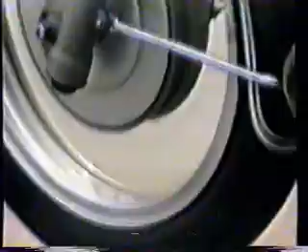Motorcycles when I move along. I got a friend who fixes them, though I said I'd write this song. I use 3 chords and I'll try to make it rhyme, but don't get your hopes up, they didn't give me too much time. I remember American bikes, but now there's just one left. Gotta be big and mean to buy one and go way into debt. And there were British bikes that you took on down the road.

Hi, motorcycle lovers. What we'll be doing this time is the wheel. We'll be taking the tire off from the rim and the rim off from the hub. The reason we're doing this for this customer is he would like to have installed stainless steel spokes and nipples.

But other times that you do this is if you've damaged your rim, or if you're doing a restoration and you want to replate a steel rim, or you wish to use your original spokes and nipples but they're rusty and you want to get them plated.

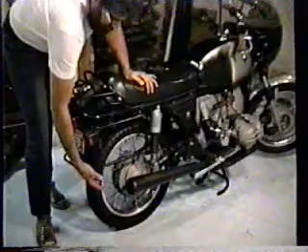The first thing we'll be doing is taking the wheel off the bike. Now most of that's covered in your manual, but there is one trick, and that is to give us more clearance between the fender and the ground. We're going to raise the bike up higher. Take a 2x4 about this long, put it under the center stand, so most of it's standing on one side.

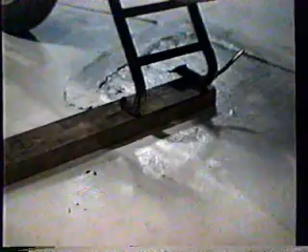Tilt the bike, slide it under there, cross over the other side of the bike, tilt it up, and with your heel, kick it back. That will now give us enough space here to easily remove the wheel.

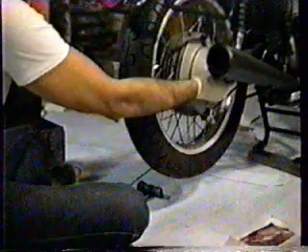Just a comment, when you reinstall the axle, you want to make sure that it's thoroughly greased, as this one already is. If you drop the axle on the ground, then you want to wipe it and put new grease on it.

Another note, on the back wheel on the BMW are the splines that engage the differential. Putting some grease in here, and I believe there is a special BMW grease for it. Putting the grease on the splines in here will minimize wear to them. You'll find it easier to put the grease on the differential.

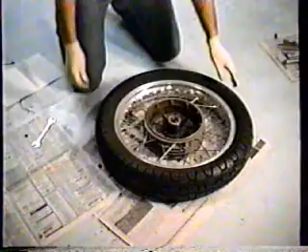We'll be breaking the tire free from the rim. To do that, you have to let the air out of the tube. The easiest way is to remove the valve core. Continental, on their tubes, come with a valve cap. It's a metal one that has a valve core tool as part of it. Most other tubes have them, but they're a plastic cap.

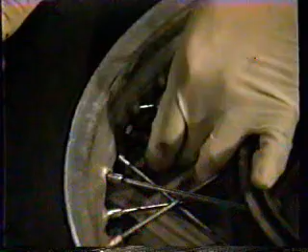You take the tool, insert it in the valve stem, and unscrew it. And here's the core. By the way, sometimes the cause of a flat tire is a leaking valve core. So I suggest, before you remove the wheel from the bike, before you remove the core from the stem, that you check that.

The way you do that is to put a little bit of water or a little bit of spit inside the valve stem and watch it very carefully to see if a bubble forms. If a bubble does form, then either your core is loose and should be tightened, or it's leaking and should be replaced. This is a tube type tire, and the tire comes away from the rim very easily.

If this were a tubeless tire, breaking the tire away from the rim would be much more difficult. So one of the ways to do that is using a vise. Take a piece of wood, put it on the back side of the vise, open the vise enough so the tire will fit in here. The piece of wood is going to protect the rim from the back jaw on the vise.

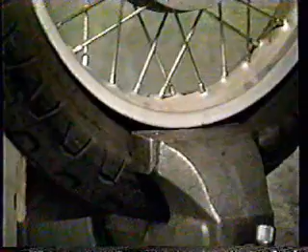And all you need to do is close the vise on the tire until it breaks free from the rim. Once you've done this side, take the wheel out, turn it around, and do it again to break the other side free.

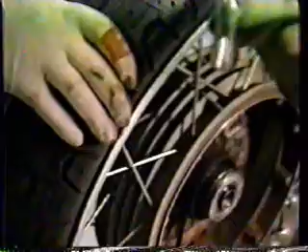When levering the tire off, what you want to avoid, which somebody else has done, is leaving gouge marks. On tube tires they're ugly. On tubeless tires, they can ruin your seal. To avoid that, you can use a rim protector, a piece of hose with a slit in it, that you slide over the rim to protect it when we'll be levering.

Making one is very simple. Go to the hardware store, buy a piece of tubing. Black rubber, clear, whatever you like. About this size. Cut off a piece.

And then slit it up the side. Okay, first take the nut off of the valve stem. Then put your 3 rim protectors on the side of the rim near the valve stem. And I spread them about like that.

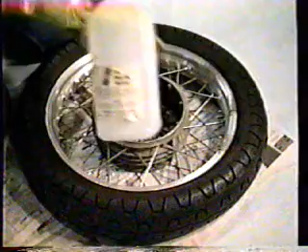To help get the tire off the rim, we lubricate the joint between them. You can use either a 50-50 mixture of detergent and water, or what works a little better, but is much harder to come by, is tire mounting lubricant. I have it in an old spray bottle.

Which I spray around the tire, and then working on the valve stem side, I put my knees on the tire opposite that, dropping the bead of the tire into the U-shaped cup of the rim. That allows a little clearance for the tire to move over towards the valve stem side.

And then putting the tire irons. Now, I am using the ones from the BMW toolkit. Putting the tire irons on the rim protectors, I lever back till the tire clears the rim. I do it again with another one, and then moving the other one to the other side, I lever off another piece of the tire.

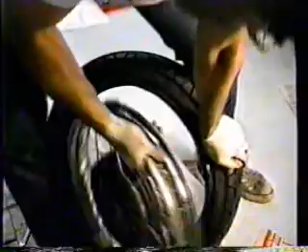There's a rim protector here on this side and a tire iron that I've worked through from this side. Lever the tire iron, and then push down on the tire until it comes off of the rim. While it is possible to take off a tire with the tire irons that BMW gives you, larger ones, longer ones, are much easier to use.

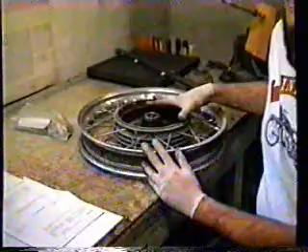Now we're going to start taking the rim off from the hub. Now, before we do that, we want to measure something. We want to measure the distance from the machine surface on the edge of the hub to the edge of the rim, the vertical distance.

Over the years, on the very different wheels that BMW or any other company has, this distance will vary from model to model. Or, for instance, if you have a steel rim versus an aluminum alloy rim, that distance might vary. And BMW supplied a large number of special tools for measuring that distance and for setting it when we go to put the rim back on.

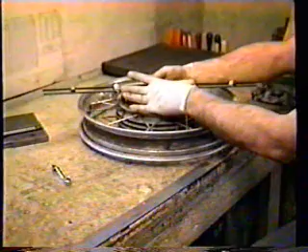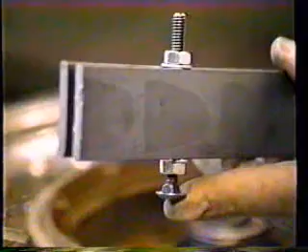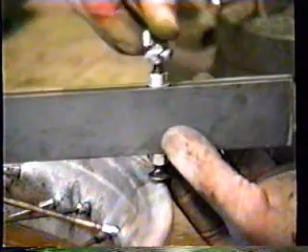There are 2 ways to set this tool. One way is, if you have what you know is a good rim and wheel combination, you just set the tool on the machine surface and diddle around with the 1/4 inch bolts, slide in and out until they are both just touching the rim. And then tighten up the nut to lock it in position.

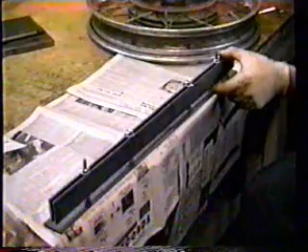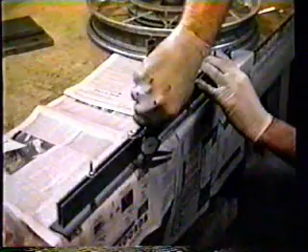If you don't have a good rim, then you need to take the numbers that the factory gives you on their prints, and I'll be enclosing a sheet with those specifications in the video, and taking your tool, laying it on a straight edge, measure the gap, and then again diddle with your bolts until everything is even and at the right height. Instead of using the dial caliper, you can use a feeler gauge.

When you're done setting the fixture, either on a good rim wheel or on a setting straight edge, we'll set it aside for now, and we'll use it as a guide later when we put the rim back on the hub. You need to be able to spin the wheel when we do this process.

And a quick and easy thing to make to help this is take a block of wood and drill a hole in it a little bit smaller than the axle in this area of the axle, and then slip the block down the middle. What we do is we put it in the vise with the axle in it. And then we put the wheel on it. And this allows us to work on the wheel conveniently.

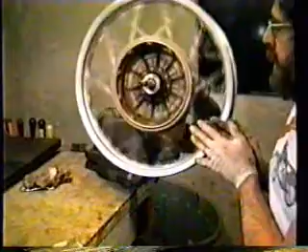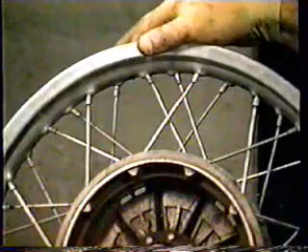Before we take the rim off, we want to mark where the spokes are going into the hub, how the wheel has been laced, in other words. Starting at the spoke hole and going clockwise on the rim, put a little dot of nail polish in the corresponding hole that it goes to in the hub. On the next spoke, put 2 dots, and on its corresponding hole in the hub, put 2 dots. On the third one, put 3 dots. And the fourth one, 4.

That's the pattern that the wheel is laced in. All the other groups will follow from that first group. So the first spoke will go here. The fifth spoke will be essentially parallel to it. The ninth spoke, and so on. That's how we will reassemble the wheel, how we will lace the wheel when we go back on. Or in this case, when we install the stainless steel spokes.

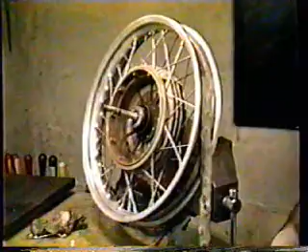Here I am taking off the rim strip. In this case, the rim strip is tape. Mostly what you'll find is that the rim strip is a piece of rubber. The rim strip is to protect the tube from being punctured by the nipples.

This is a spoke wrench, and it's of course used to turn the nipples. Spoke wrenches come in different sizes. These are labeled 8, 9, 10, and 11. The one that fits this rim is the number 10.

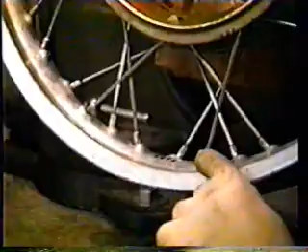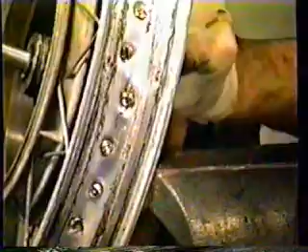Once you've loosened the spoke with the spoke wrench, to make it go a little faster, you can then unscrew the nipple the rest of the way with a screwdriver. And then we keep doing this until we have all the nipples out and we can remove the hub.

If you have a difficult to remove nipple, what you may need to do is use both the spoke wrench and the screwdriver when you first start to turn it. If you have a difficult to remove nipple, skip it. Release as many as you can, and that'll take tension off that difficult to remove one, and then you may be able to get it easier.

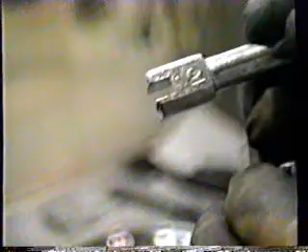This is what you'd like to avoid. BMW stock nipples are a relatively soft brass, chrome plated. To avoid this, you should have a spoke wrench that fits snugly around the nipple. To get the kind of fit I wanted, I took a slightly undersized spoke wrench and I filed it until I got the fit that I wanted. Also, when you are unscrewing the nipples, it will help if you heat them up. Then they may be easier to take off from the spokes.

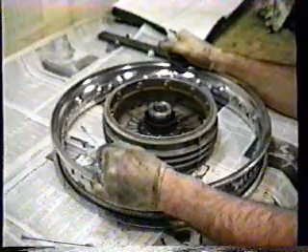The next step in the process is to lace the wheel up. That means we're going to install, but not true or even tighten up very much, all the spokes. We start with the hub and we locate the first spoke hole, which has the single dot that we marked when we took the wheel apart. And we align that with the first spoke hole on the rim clockwise from the valve stem hole. By align, I mean that when we put the spoke in, it lines up with the spoke hole in the rim.

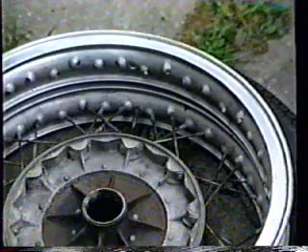If you're using a new rim, lay it on top of the old rim in the same orientation and transfer the nail polish marks to the new rim. We were going over the case where we're just replacing spokes. But let's talk about a situation where you have a hub and you're going to put a new rim on, or you've gotten a basket case which has the hub and the spokes and the rim all separate.

There is a question of getting the rim flopped over to the correct side. What I mean by that is you might want to lace up the hub with the rim this way or this way. It's possible to do it both ways, but only one way is right. How to figure out the right way is what we'll be going over right now.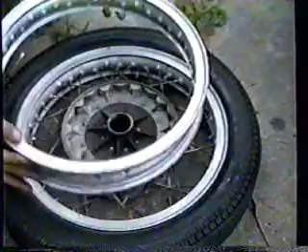The easiest way, if you have an exact match, is to line up the valve holes and look at the first nipple hole right after the valve hole. Now the way this is oriented right now, this nipple hole is higher than this one. This one is up this way, and this one is not as far up this way.

On the rim that is already on the wheel that we're replacing, this nipple hole is lower than this nipple hole. So to get this oriented properly, we flip that over, and now we see that this nipple hole is lower than this one. As it is down here, this one is lower than this one. So now we would mark our nipples here and correspondingly on the new rim that we'll be putting in.

Look at the pattern on the hub. Here's a spoke, and here's where it comes into the hub, right there. And here's a spoke that it crosses over. And here is where this spoke goes into the hub. This spot is higher up this way, further than this spoke is.

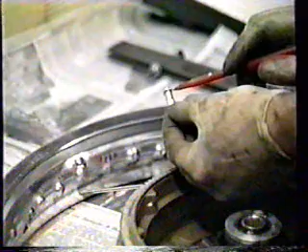Before we put the nipple on, put a little bit of glue on the threads of the spoke. This glue was provided by the spoke manufacturers, Buchanan. But Loctite's anti-seize will serve just as well. Some people suggest putting a little bit of oil here so they spin freely when you're putting them in. I'm not going to do that on this wheel. It makes me a little worried that oil will be left over on the rim, soak the tube, and do damage to it.

Putting the first spoke in, run it down so there are maybe 4 or 5 threads left exposed here. And we'll do that all around so that all the spokes have about the same number of threads sticking out from the nipple.

Skipping 1, 2, 3 to the 4th nipple hole after the one we just finished, and going to the next hole on the hub that's at the same angle as that one. We put our next spoke in. And so we go all the way around with this first group of spokes.

When building the wheel, use a little common sense. Make sure that the group of spokes you're putting in is not the top layer. It's easiest to lace the wheel up if you do the inner spokes first. You can see that this hole is beneath this hole. And so if we do this group of spokes before this one, we won't have to try and work underneath.

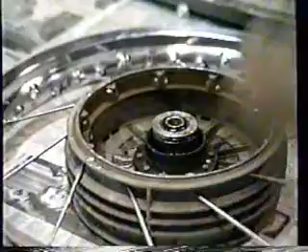Okay, doing the next group of spokes, from this side is the one I marked with 3 marks, and that'll align to the rim that has 3 marks, or the third 1, 2, 3 spoke hole from the nipple. So, in goes the spoke, crossing over the other one, making it a little bit easier, and threading it into the nipple.

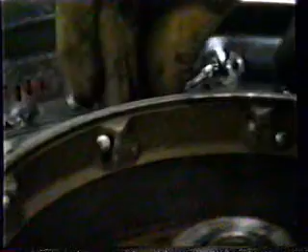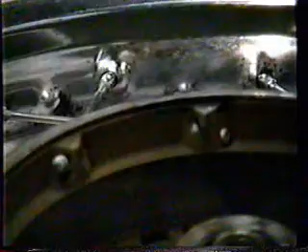Putting a little bit of the glue on each of the spokes. And again, threading it in. On stainless steel spokes, you just have to use glue. It'll gall the threads. What that means is it'll tear little bits of metal off otherwise. And I shouldn't have to tell you that that's not a terribly good practice. And dipping the spoke into the anti-seize.

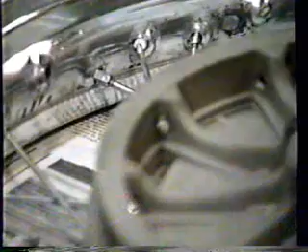Turning the wheel over and locating the spoke hole that has the 2 dots on it. We'll run a spoke from there to the nipple hole. Now that I turn the wheel over, that nipple hole is now 2 holes counterclockwise of the valve stem hole.

And the last group, which is sort of self-evident where they'll go. 1, 2, 3, 4th hole there, and over here we have the 4 little nail polish marks. I don't go wildly mixing and matching hubs and rims. The angles that these holes are drilled at need to be in the correct place so that the spoke lines up with the rim. If the rim is smaller, this angle changes. If the rim is bigger, it also changes.

Okay, the wheel is laced up, but as you can see, all the spokes are loose. So what I'll be doing now is going around, starting in a convenient place, the valve hole, and giving each of these nipples maybe 4 or 5 turns, and then I may go around a second time and give them 1 or 2 turns until this play is gone, but I have roughly equally run the nipples onto the spokes.

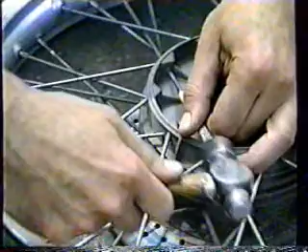The easiest way is probably with the screwdriver. So in this case, just because it's convenient, I'm running the nipples all the way up the threads, so the threads are no longer visible. Some people suggest that you seat the spokes into the wheel hub by tapping on them a few times.

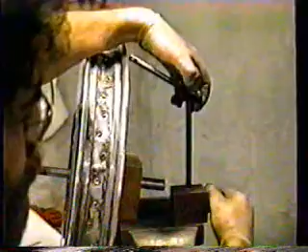This is a little tool I've made for indicating against the rim, and we'll see how it's used in a moment. I attach it to a magnetic base that's used with dial indicators. You may have to rig up a piece of wood or a clamp type arrangement to hold it next to the rim. Here it is installed, and you can see that our rim needs some work.

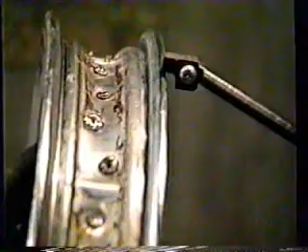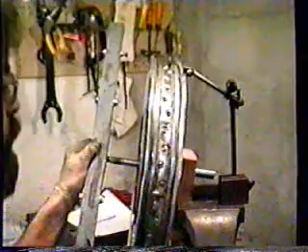Now, the spokes right now are snugged up, but we need to true it. At the same time, we true it in this direction and in this direction. We also need to keep track, with the tool we made earlier, of the position of the rim with respect to the hub. So right now, the rim needs to go over that way. See the gap here? We need to move the rim that way.

So let's find the spots where it's furthest away from our tool. From here, you can see, to here. That's where it's far away. And you can hear from the rubbing sound that it's also high this way. So what we want to do is tighten up the spokes on this side of the wheel.

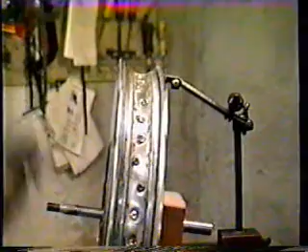I use my hands on the spokes that I'm going to work between. I'm going to work between these spokes. Also, you can assume that the spokes in the middle of the group, from where your hands are, are the ones that you're going to turn slightly more. So I may turn these nipples 2 turns right now. The ones near where my hands were, where the run out is small, I'm only turning them 1 turn now. Okay.

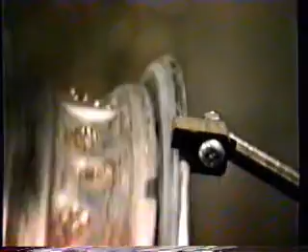If you have good control over this tool, an excellent aid is to keep moving it in so that it rubs. Right here, for instance. Here it's rubbing on the top. Here it's rubbing on the side. So I'll tighten up again the spokes on that side. As you can see, we're getting closer.

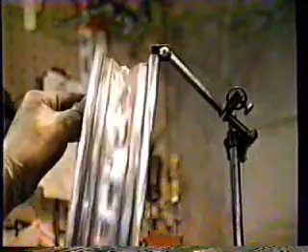The important information we want is coming from that gap. You can also hear it. There's a point right there where it's rubbing. Here it's not rubbing. Here it is. In that spot where it's rubbing, we want to correct that. In this case, it's going up this way, high. To correct that, we tighten up the spokes on both sides of the rim, and that'll bring the rim down this way. And we start, find where the noise is, find where it isn't, right about here.

Here's the noise. No noise. Well, no noise. Noise. No noise. I have my hand where the first place that there was noise, no noise. And the second place is here. I count the number of spokes between those. 1, 2, 3, 4, 5, 6, 7 spokes. And I give each of those spokes a quarter or a half a turn.

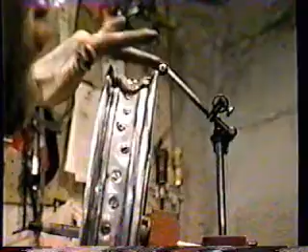Now with that up and down noise gone, I reposition my tool and I go after the side. Here's it scraping. Here. And here. Now I have the choice of bringing those places that are not scraping over this way, or those places that are scraping over this way. And I decide that based on this tool again.

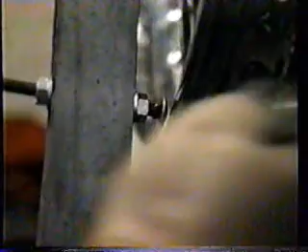So checking in a few places with this tool that we made earlier, I see that there's a slight gap here. I want to bring the rim over this way. So that means I'll tighten up the spokes on this side of the rim, so my tool will not be scraping. So I find a place that's scraping, and I tighten the spokes on this side so they don't scrape.

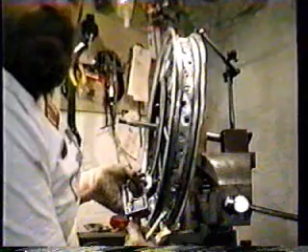Now, to give you some idea of how tight the spokes are to be, you can get an idea using your spoke wrench and the scale. About this torque stuff, I'm trying to get across how much to tighten the nipples. This is something that comes with experience. For those of you without this experience, I'm giving you some approximate numbers to substitute for it.

The stainless nipples will work well with about 70-75 inch-pounds. The stock BMW brass nipples work with about 40-45 inch-pounds. These numbers are only guidelines until you develop your own feel. If you over-tighten the nipple, it will deform. If you under-tighten the nipples, the spokes will come loose as you drive the bike.

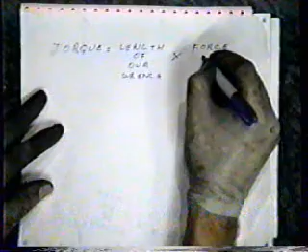We need to know how hard to turn our wrench. An approximate way to figure that out is to determine the torque that we're exerting. That is equal to the length of our wrench times the force that we are pushing or pulling, let's say pulling, the wrench. So we can measure the length of our wrench with a ruler.

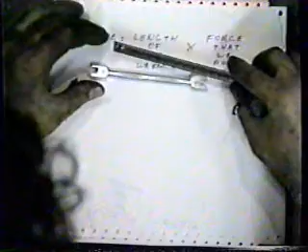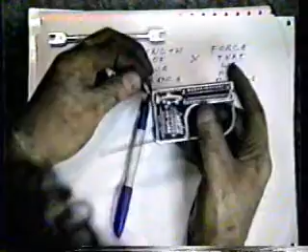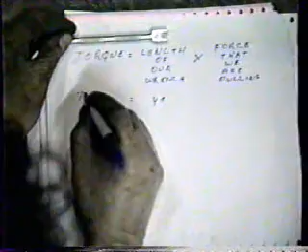And I'm going to go from here to here, and let's say it's 4 inches. This is about 4 inches. We can measure the force by using the scale here. Now, the torque that we want, as I said before, on a 600cc or larger bike is about 70 inch-pounds. And we'll make this in inches. Dividing 4 into 70, that's about 17 and a half pounds.

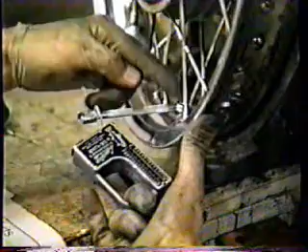Here I have the setup, 4 inches about from here to here. And pulling in the same plane as the wrench, I can see that the nipple starts to turn at about 16 here. I'm not going to measure each one, but now I know about what 70 inch-pounds is. And so I'll feel each of the nipples and see that it's about the same. And I may go around on all the nipples and turn them slightly to bring it up to 17 and a half or so.

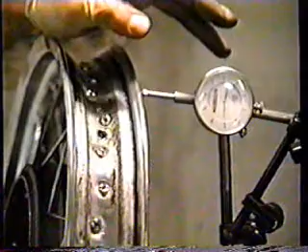As we get very close to being finished, I've traded my little tool in for a dial indicator. The book calls for 8 thousandths runout this way, 0.2 millimeters, and 40 thousandths this way, 1 millimeter. With an old rim that has score marks on it from tire irons, that's virtually impossible to achieve. The new rim you can, so do the best you can. The other measure then would be coming down from the top. I know you can't see the dial indicator, but you're allowed 40 thousandths this way.

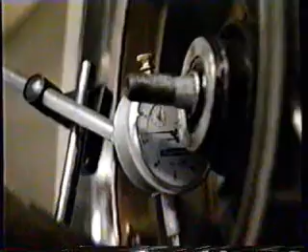Also, you want to make sure that after you've built the wheel, you haven't pulled the brake drum out of round. So I mount the dial indicator so it's reading the roundness of the brake drum as I turn the wheel. This one's very good. There were no numbers in the book. A few thousandths, couple, 2, 3, 4 is probably fine. If it's getting more than that, you may have to deal with getting something done to the drum.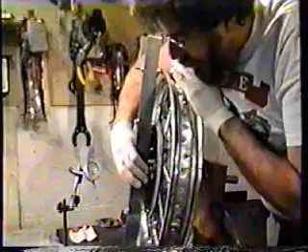You also want to make sure that the spokes are not protruding through the nipples here. If they are, you need to grind them off. Otherwise you'll have a flat tire and be very unhappy about it. And then check with your tool to make sure all the points are properly lined up. Now it's time to remount the tire. First, make sure that your rim is clean. No metal particles left in here or other sort of grunge. Wipe it with a rag or whatever it takes to get it clean.

First thing we'll be putting on is a rim strip. We can either use a rubber one or 3 turns of duct tape will work quite well also. Now I'm lining up the valve stem hole in the rim with the one in the rim strip. It's just like a big rubber band. Okay, now we'll mount the tire.

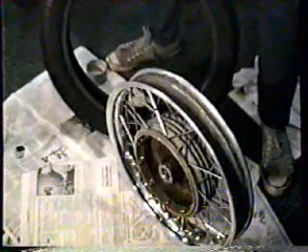Now, most tires these days have directional arrows on them. This one says driving wheel and front wheel. There's a rear wheel. If the bike were over here, the bike would be facing in that direction, going forward that way. The wheel would be rotating in this direction. And we'd like to get the side that says driving wheel going in that same direction. So we'll be mounting these like so. And many tires will have a red spot, sometimes up here, wherever. We align the red spot on the tire with the valve core hole on the rim.

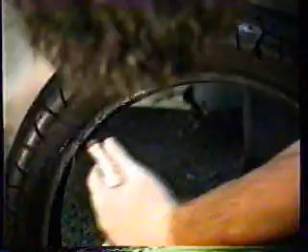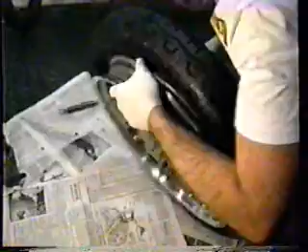Lubricate up the tire with your soap solution or your proprietary lubricant. Drop one part of the tire into the well of the wheel. One bead over the tire. And here I put one of my rim protectors in, and I work a tire iron up over here. And there's the first bead. Over the rim.

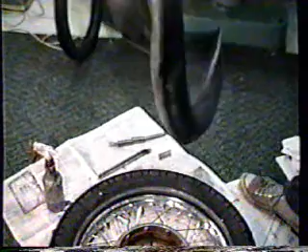Inflate the inner tube just a little bit to give it enough shape to help you avoid pinching it as we put it in. But don't put so much air in it that it's going to be difficult to get the tire over the rim. Well, maybe about that much. Never use a patched tube. It's even a good idea to use a new tube whenever you reinstall a tire.

A little talc on the tube will aid in keeping the tube from sticking to itself and getting folded over and ultimately pinched after you've installed it. Some tubes come already powdered. I can't remember which ones. I think the Michelin ones do. Okay.

Now we find the spoke hole and push the tube in and then bring the valve back out. It's a little awkward doing this. Actually, it hurts a little bit with your hands. You reach down in there. Bring it through and take the nut and thread on a few turns to keep the valve stem from pulling back through.

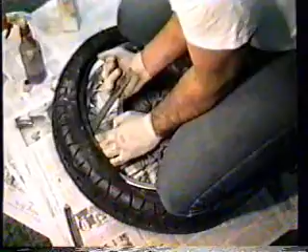And the last one, you need to be the most cautious of, so as not to pinch the tube. The last little bit you can often work in just by pushing on it. And make sure you don't leave any of your rim protectors in the wheel.

Okay, now we inflate the tire, which is easiest to do with an air compressor, but I'll do it with the pump. And we want to make sure that the bead is properly seated. Right here's the bead. You can see that as it goes around. And when it's properly seated, it will be the same distance all the way around from here to the bead. Push the valve stem back up so that you know it's not caught by the tire.

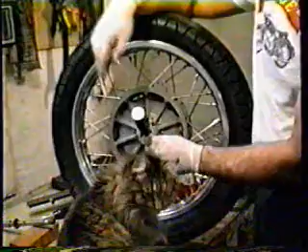There are many ways to balance a wheel. This is a bubble balancer. You can see the bubble here. When we have the wheel balanced, we'll have that bubble in the bullseye. There's a cone here and another cone here. And I put that through the wheel. And with the second cone, I thread that on from the back side. And now I take the wheel and I hang it from this arm.

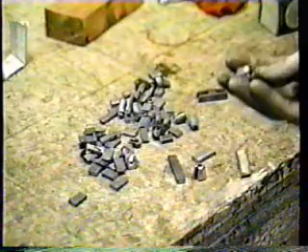And I will take weights and put them on the rim until I find the right spot and the right number of weights so that that bubble is in the middle. Here's my lifelong collection of wheel weights. Some of these, this is a BMW one, go onto the spokes. The wheel weights that are attached to the rim are done with two-sided sticky tape that has a bit of foam.

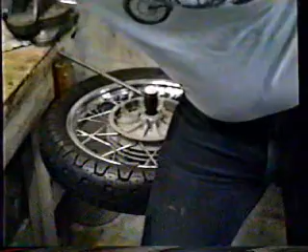I put weights on the rim until the bubble is centered, and then I mark where those weights go, a little bit of chalk, and put the two-sided sticky tape here, and then the weight on the rim.

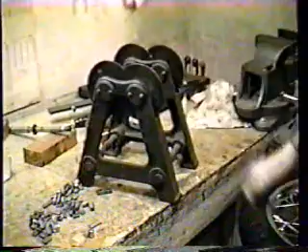Another type of balancer is a roll balancer. The wheel is mounted vertically. There's an axle through the wheel, and the wheel will just rotate until the heavy spot is on the bottom. You add weight to the top. You give this wheel a slight spin, and if it stops randomly each time that you spin it, you do it half a dozen times. If it stops randomly, then it's properly balanced. If it always stops at the same spot down, then you need a little more weight opposite it.

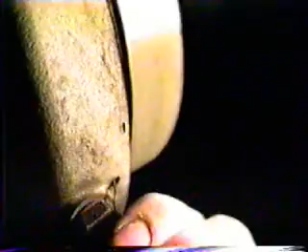If you want to keep oil, differential oil, off your brake shoes, keep this hole clean. Use a wire and ram it up there. You can see this one's pretty dirty. Until all the crud comes out. Now /2s have this hole also. And later bikes have a second hole here, which you can also keep clean with a wire.